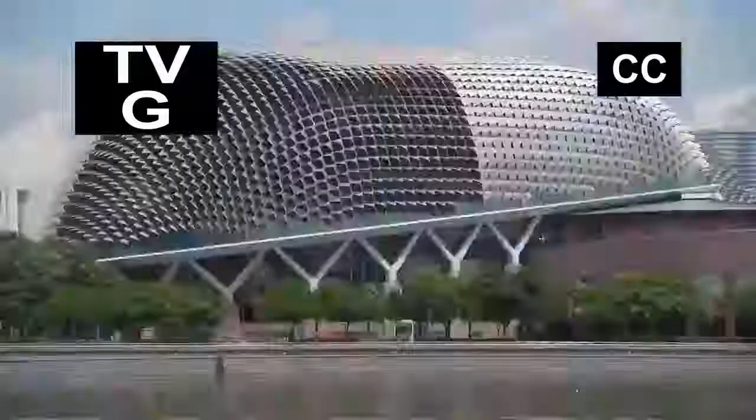My name is Danny Forster, and this is Build It Bigger. I'm an architect, and I've spent years traveling the globe investigating incredible feats of architecture. And right now, I'm going to take you behind the scenes of one of the largest construction projects in all of Asia. Singapore is reinventing itself. This small island nation is attempting to finish one of the most audacious buildings on the planet.

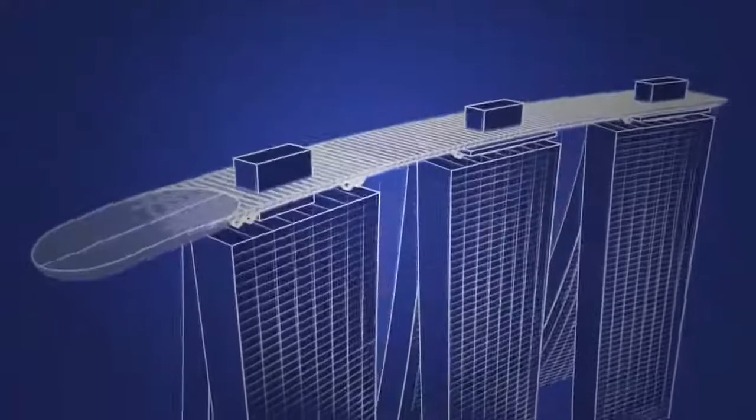It's the country's first casino, 3 skyscrapers, covering 9 million square feet, and topped off by an engineering masterpiece, the first ever Sky Park. Longer than 3 football fields, with gardens, swimming pools, and restaurants, all higher than the Seattle Space Needle. We're actually in the pool right now. We're in the pool. This is the view from the pool. Wow. It's pretty spectacular. That is amazing.

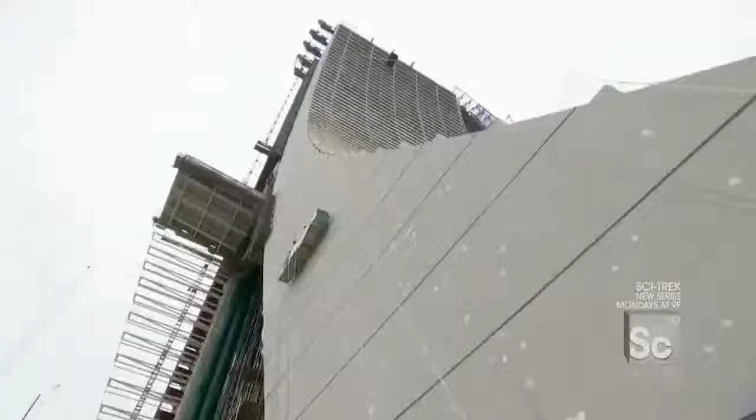To finish it, crews must perform some of the highest and heaviest lifts ever attempted. I mean, you're putting a piece of steelwork the size of an aircraft carrier on top of 3 towers. Tackle one of the largest paint jobs on the planet. You would never do this in America. And erect one of the longest cantilevers in the world. 200 feet out over nothing. Oh my God, that's enormous.

I'm in Singapore, a tiny island nation with less than 5 million residents. In fact, the entire country is smaller than all of New York City. Located at the southern tip of the Malay Peninsula in Southeast Asia, the main island of Singapore is both a city and a country, one of the most densely populated in the world.

Culturally speaking, it's a somewhat strict and buttoned-up environment. Chewing gum against the law. Insensitive behavior is punishable by fine. And if you're caught vandalizing a building, you quite literally get hit with a stick. But despite this conservative cultural backdrop, Singapore is attempting to reinvent its image by doing something totally surprising. They're going to open a massive casino.

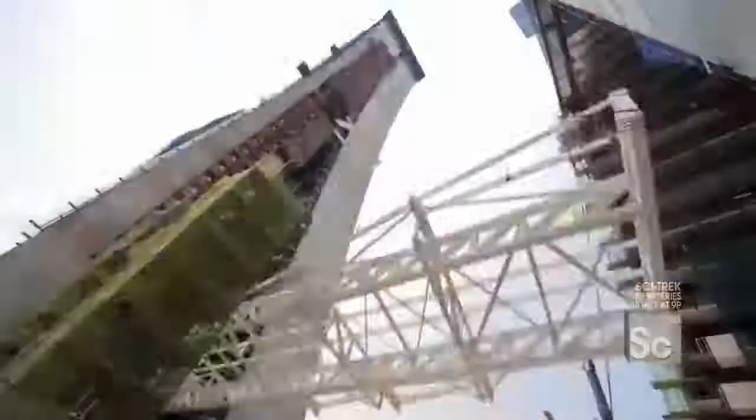With no natural resources of its own, Singapore is risking $5.5 billion in hopes of cashing in on the gambling boom exploding across Asia. It's a pretty significant gamble because for Singapore, we've never had gaming before at this scale. We've never had a resort at this scale. Yes. You're taking a kind of a major leap. Yes, it's certainly a transformational project for Singapore. Where you hope to actually not just double, but triple the tourism receipts. That's big.

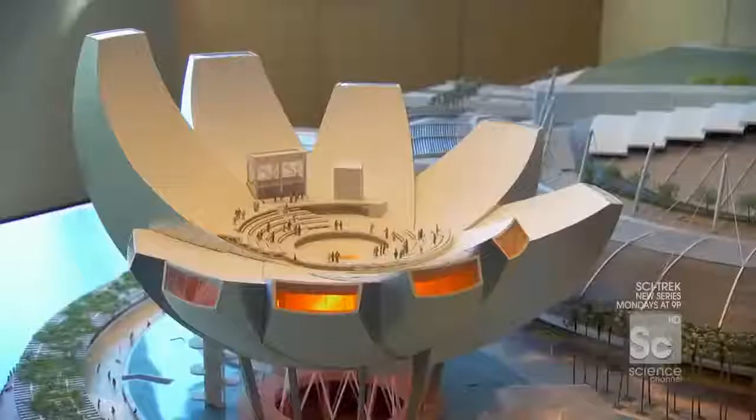The centerpiece of this giant transformation, the Marina Bay Sands. One of the biggest and most expensive casino complexes in the world. Unlike any hotel and casino ever built. Rather than just being kind of a traditional hotel and casino that we might find in Vegas, instead, we have a museum, you have theaters, you have retail, you have a casino, massive convention center, 3 incredible hotels, and all of that capped by the first ever Sky Park. That is absolutely right. The Sky Park on the very top will become the icon of Singapore, we think.

In a move that has never been done before, world-famous architect Moshe Safdie put a park across the top of 3 massive skyscrapers. An 1,100-foot-long urban oasis with tropical gardens and one of the longest swimming pools on Earth. All of it perched 55 stories above the ground.

So, Brendan, how do you describe a Sky Park to people? I mean, it's just a fantastic structure. I've never seen anything like it. There's 3 55-story towers, and you're putting a piece of steelwork the size of an aircraft carrier on top of it. So it's quite a feat. And there's a park up there. There is, well, there's more than that. There's observation decks and swimming pools and restaurants and all sorts of things. So it'll be a little city in itself.

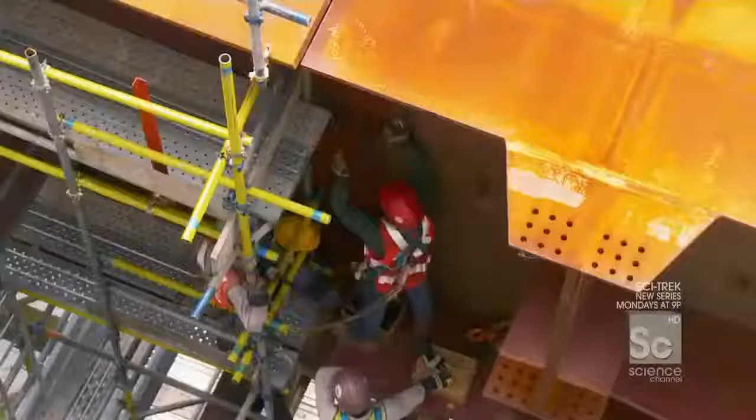The biggest challenge for builders, lifting 7,000 tons of steel, which is more than the main span of the Brooklyn Bridge, on top of 3 650-foot-tall buildings. To get it up there, the team divided the structure into 14 large but more manageable segments. 6 form the bridges connecting the towers, and the other 8 make up the observation deck, which sticks out 218 feet from the end.

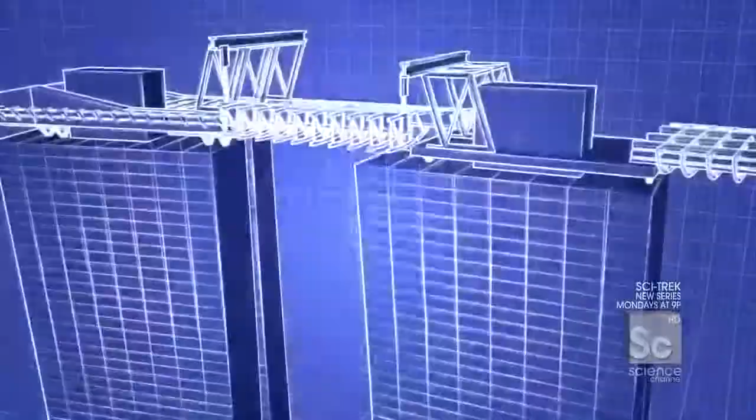And right now, crews are about to lift the second to last bridge segment, a massive 350-ton piece that will hang between towers 2 and 3. It's a little after 7 p.m., and on most job sites, it'd be quitting time, right? Folks would be going home. But here in Singapore, we're about to begin one of the most critical lifts in the entire project. That bridge segment right there, an over 350-ton chunk of steel, is about to get lifted up over 650 feet in the air.

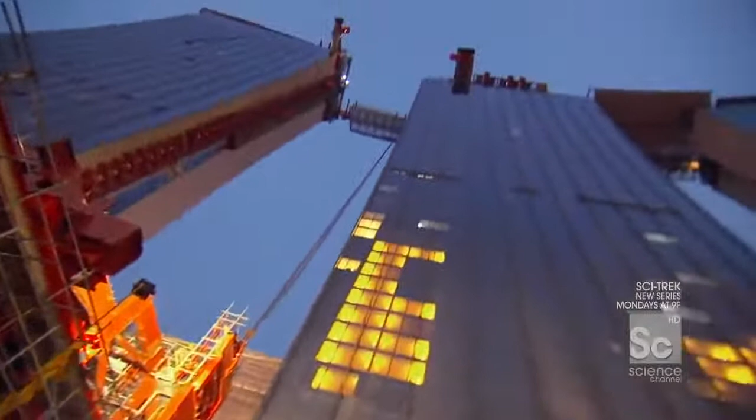I mean, you know, in principle, this sounds crazy, right? Yes. I mean, we're actually taking a bridge, lifting it up, and putting it on top of 2 skyscrapers. Yes. This has never been done. Never done. So you got to be a little bit nervous to get this thing up. Oh, definitely. Yeah. We have to get it right.

Lifting this piece will take some of the strongest hoisting cables ever designed. Going up? All right, Solomon, up here? Yep. They get attached to the very top of the segment, 5 stories up. All right. And now, at long last, I'm on the top of the whole bridge segment, and you really get a sense of its length, because look at that. It spans all the way out between 2 full towers over 150 feet long.

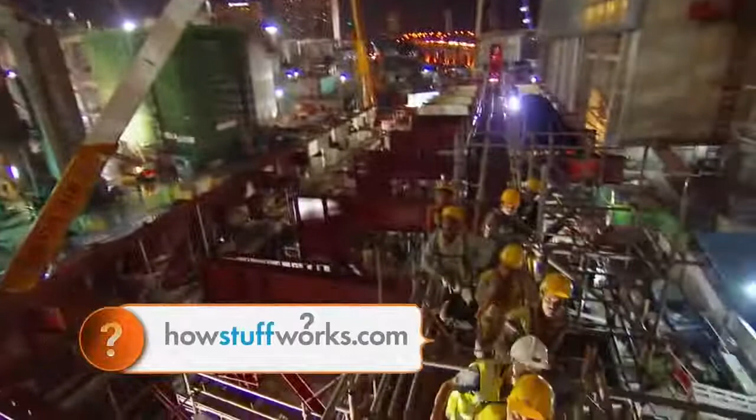And here, this is what it's all about. This is the shackle coming down over 600 feet up. And to really get that point, come here, check this out. Look at the amount of bound cables inside of this thing. Just the density. It's 2 of these shackles, one on this side, one on that side. We're gonna lift up over 350 tons of steel.

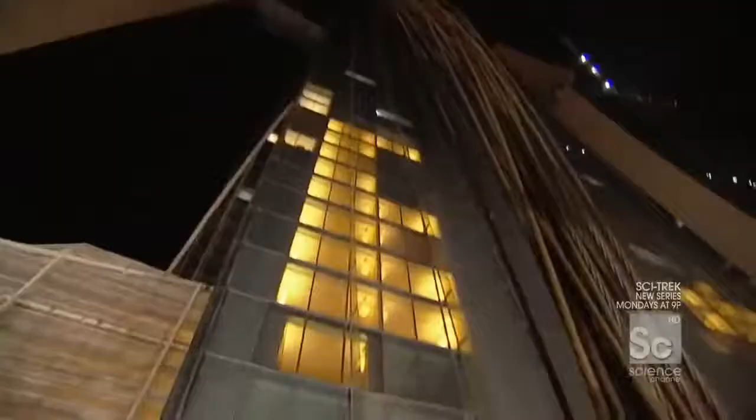All right, you call the man upstairs. An operator from the top of the sky park lowers the shackle down. There she comes, there it is, here it is. Okay, 960 mm. It has to line up within 1/10 of an inch for this 150-pound anchor pin to fit through. Oh no, I'm stuck. Push, fight, come on, shake it a little bit. Hammer! Give it to me, Poppy. Out here. You ready? Here I come.

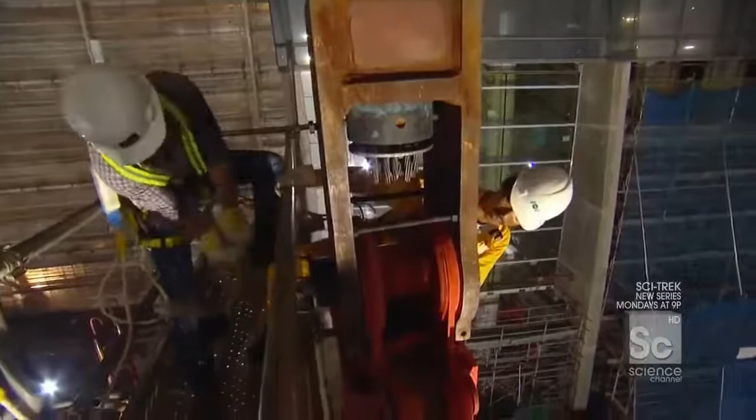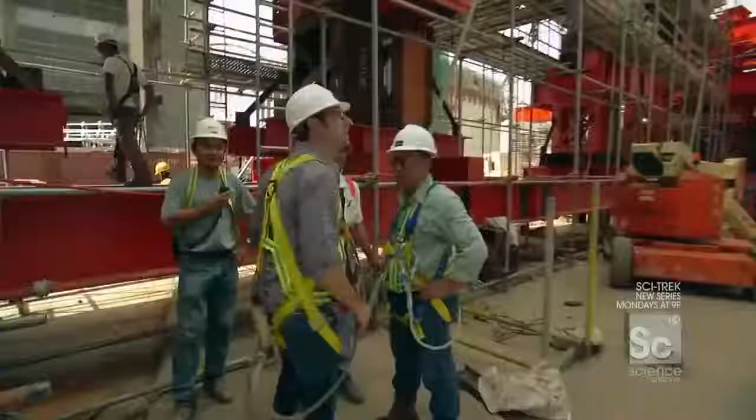Once the pins are pounded into place and the shackles are connected, there is one final step to make sure that the load is secure. Woo! Overnight, crews test the connections for 12 hours by hanging the segment just 4 inches above the support. If everything looks good, it is ready to go up. Okay, Solomon, she's floating. Yes. 4 inches off the ground. Ready for the lift? Yes.

How's the wind? If you can see it, it is swinging. And if it swings, it might hit the building. So when the lift begins, the concern is in a strong wind, like a pendulum, it could move and actually hit the building. Yes. It's that close to the building? It is very close to the building. Because of the curvature of the towers, this piece must pass within 10 feet of 2 glass skyscrapers on its way up. Any wind over 5 miles per hour is enough to call off the lift. So are we good? Are we ready? Yeah, good. So it's now okay to go.

Okay, I'm ready. Typically, crews would use tower cranes for heavy lifts, but this segment far exceeds their capacity. So instead, engineers are borrowing the technology from a different kind of construction: bridge building. Even the most powerful tower crane can lift about 20 tons. This thing weighs over 360, not an option. So they went with something called a strand jack. And to understand how it works, imagine 2 hands or clamps holding a rope. One hand locks the rope, the other brings the rope up, grabs the rope, goes back for more, brings up more rope, and so on and so forth.

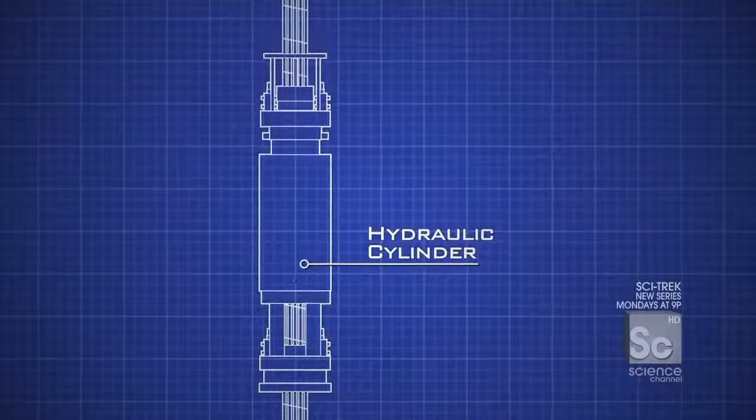Strand jacks work on simple hydraulics. A bundle of 22 half-inch diameter cables passes through 2 clamps. The top clamp grips the strands and moves up almost 2 feet. Then, the bottom clamp locks the cables in place while the top moves back down for the next pull-up. It takes 2 enormous strand jacks to lift this segment, one on each tower. Combined, they could lift the Statue of Liberty. It's the first time that this technology has been used to make lifts this heavy from the top of a skyscraper.

Tony? Danny. Welcome, Danny. Good to meet you. Good to meet you. Tony, where am I standing right now? Well, you're on the Sky Park. So this is kind of where the action is. This is where the pool is. Yep. Right where we are now is the second swimming pool. We're actually in the pool right now. We're in the pool. This is the view from the pool.

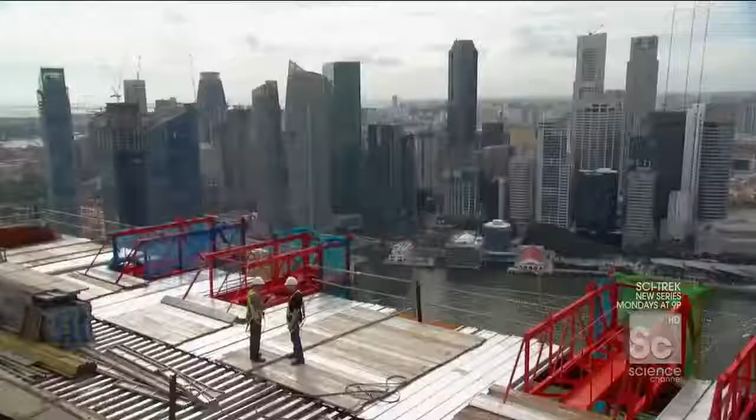Oh my God. People will be able to swim out to the edge of the pool. Yep. And literally, there'll be no edge, right? It'll be an infinity edge looking out over Singapore. Wow. It's pretty spectacular. That is amazing. And what's making all of this happen is this really just nasty-looking beam. That's right. So this enormous frame is supporting the strand jacking units. Now, can we actually head up top to the strand jack? Yeah, we can. Let's go this way.

The strand jack sits on a temporary support structure that extends 30 feet out from the side of the tower. So, Tony, where we're walking right now, we're actually leaving the skyscraper below us and now heading out. We've just walked off the edge of the building.

Okay, so I am now standing at the very top of the strand jack. And you know that because right here, this is it. This is the top of the cables. And what we're about to do, every 30 strokes, they stop everything, clamp the lift, and spray some lubricant inside to make sure everything moves real freely. Unfortunately, I'm getting tasked with that role right now, so what do you got, some WD-40 we're doing this with? Look at this guy. Why is this the most low-tech thing in the world?

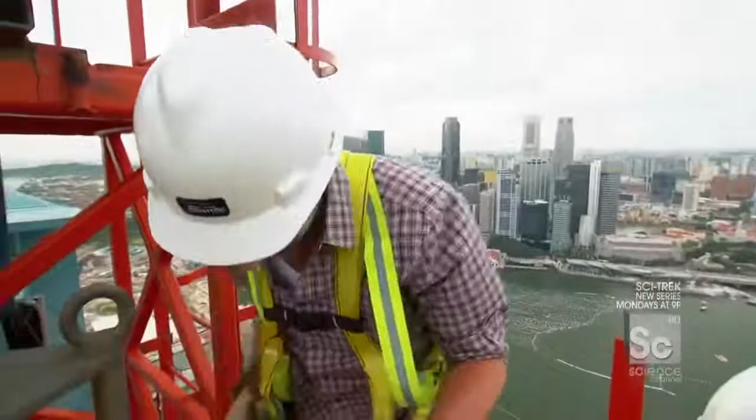Okay, so now what we've done is we've taken the collar off, we've lowered the jack down, now we've exposed the cables to give us good access for some good greasing. Okay, Romley, how do you grease it up? Spray and pull out. Put in, spray, pull out. Go in, spray, pull out.

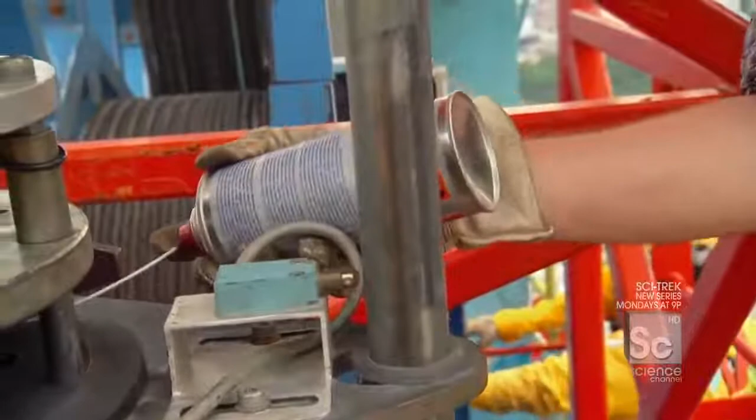You know, it's sort of humbling to have to climb up to this point, to have that behind you, to have to take a spray can like this, stick in, spray, pull out. Stick in, spray, pull out. Go in. These guys have to grease these cables once every hour for the entire night to get this segment up the final 500 feet to the very top of the sky park.

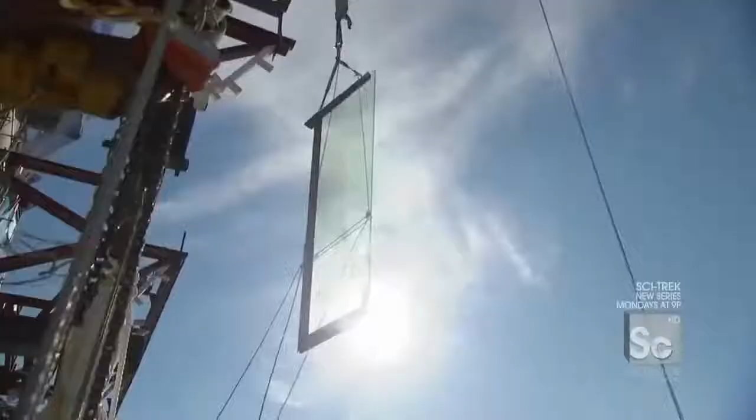Coming up, a one-of-a-kind solution to fight Singapore's intense sun puts up a fight of its own. Hang on. Whoa. I'm gonna pull you right outside of the basket.

Singapore is just 14 miles long. And with literally nowhere else to expand, this tiny island is increasing its footprint by actually filling in the sea, creating almost 1,000 acres of land on which to build an entirely new downtown. So tell me something. If I was standing here 5 years ago, what would I have seen there? Well, 5 years ago, you wouldn't see the floating gallery, you wouldn't see the wheel, you wouldn't see Marina Bay Sands, neither would you see the financial center. So this is a radically different skyline in just 5 years' time.

Yes. Singapore's evolution involved 30 years of land reclamation, followed by 5 years of construction, all culminating with the Marina Bay Sands. So 5 years ago, this would have been called the old downtown of Singapore. Yeah. And now with the Marina Bay Sands completed, this becomes the new downtown. Yes, absolutely.

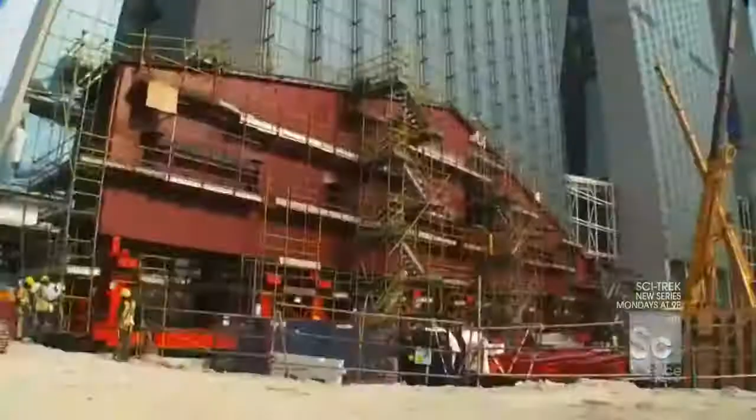The Marina Bay Sands' 3 hotel towers will offer guests phenomenal views of Singapore's new downtown. But they also had to be a stunning centerpiece for the city's redevelopment. So, to define their curved silhouette, the architect clad the tower facades with 1,900 glass fins, which also perform a key functional role for the building.

The western face of the towers gets the most intense afternoon sun, so when the light hits the fins, they actually deflect the sun's rays, casting a shadow that reduces the heat on the hotel rooms by 20%, while still enabling clear views of the bay. But this distinctive design feature is also one of the most difficult to install.

I think today is gonna be one of those days where I go and do something that I kind of think I shouldn't do, but in the name of really understanding how it is they build this building, we're gonna do it anyway. I'm gonna take you in a gondola up the side of a building, almost 600 feet, to install glass fins. And the guys who are going to help me do it are right here.

Terry? Hi, Danny. Good to see you. David, how are you? Danny, good. Not bad. What are we up to, fellas? We're actually going up to the top. Basically, we're going to install the last fins to Tower 1. And these fins are actually hanging perpendicular from the facade of the building. That's correct. Each fin is 10 feet tall and weighs 400 pounds.

They're hung in straight vertical lines, protruding up to 4 feet from the side of the tower. Because the facade actually curves outward 5 degrees at the top, there would not be enough clearance for the Sky Park lift to pass by. So 12 fins in the upper corners of each tower were left off until now.

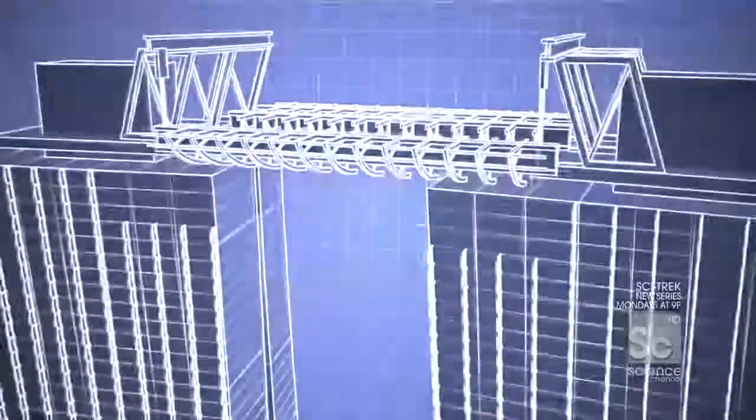So this is it. We are closing up the curtain wall of Tower 1. Yes. Big milestone. Big milestone. All right. Take me over to my maker. Let's do this. Okay. No problem. Lead the way.

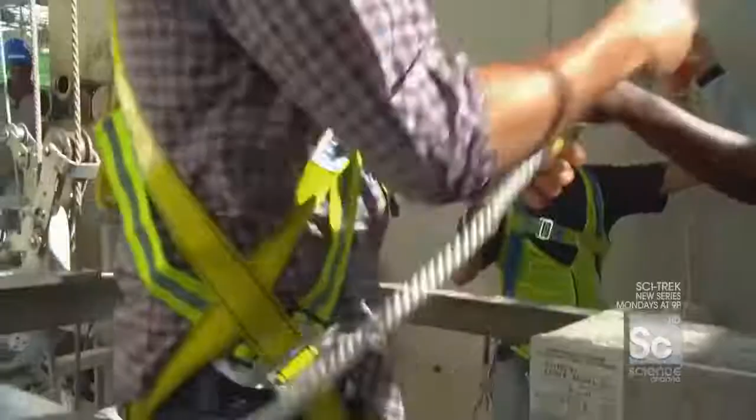Terry's crew installed the fins from a 6-foot-long gondola hanging off the side of the building. Okay. We doing? All right. You gotta be kidding me. It's basically the size of a bathtub, swinging from 2 sets of 650-foot-long cables tied to the tower. Show me the safety, please. It's so precarious that I'm going to be tied to a separate cable in case the main cable fails.

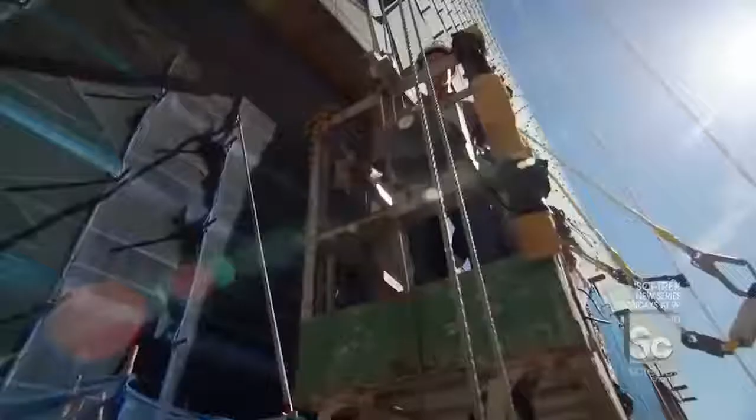Yeah, here we go. The gondola travels at just 0.2 miles per hour. Here I come. Moving along, just moving along. So it'll take me more than a half hour to reach the top. Oh my God. This gondola looks like it was built by the Unabomber. Sometimes I don't really feel like I give you exactly what's going on for me right now, so I want to give you just a little taste of what I'm seeing. There is a fantastic view of Singapore. There is Jay, my chatty friend. And there is not a good situation.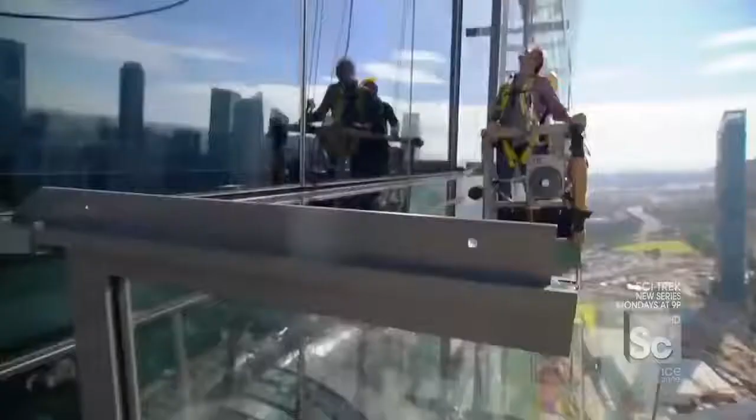There she is. Oh, the wind is really moving up here. That looks safe. Hey, fellas! How are you? Okay. Nice weather, huh? Okay, this is something you don't see every day. I'm outside a skyscraper, and right here, right now, I am touching the top of the building. We are on top of the skyscraper. All right, who's ready to install some fins?

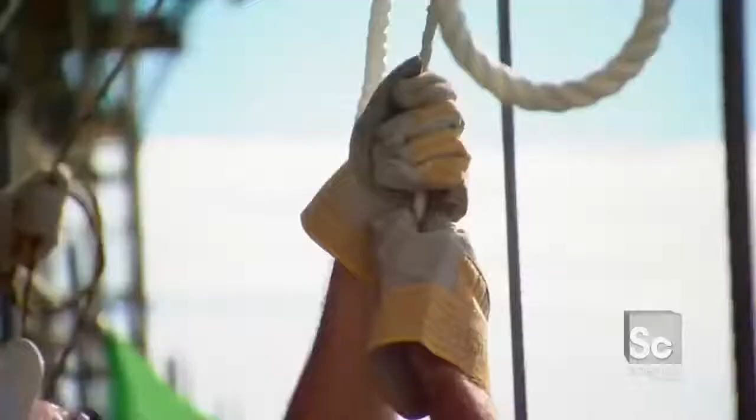Each fin is a custom-built pane of solid glass. I've got the line. Hang on. Look. On a calm day, they are extremely difficult to manage. The wind is blowing this thing out. Give me a hand. But on a day with even a light wind, the task is almost impossible. Hang on. You thought I was gonna pull you right outside of the basket. Hang on, give me some help. But I'm not kidding. Every time you get a little gust of wind, I can feel my feet getting cold a little bit. There she is, slowing down.

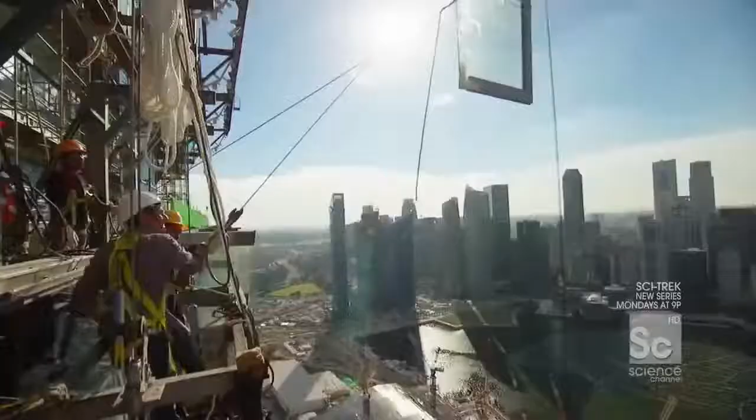It's basically like a big double laminated glass sail. And if the wind catches it, I mean, it moves. Okay, let it come down a little bit more. The fin can swing up to 20 feet while attached to the tower crane. Coming this way? Okay. Watch out. Someone help him. That's just too dangerous for the final installation. So the team has to transfer it to a more precise chain block mid-air. Whoa. Hold that side, please.

All right, so this is it. What we're doing right now is essentially taking the load from the crane and transferring it to that chain block. Are we in? Okay, I think we're set. This is another one of these moments in my life where I say to myself as an architect, did you really need the fins? Did you have to have fins? Building would have been fine, you know?

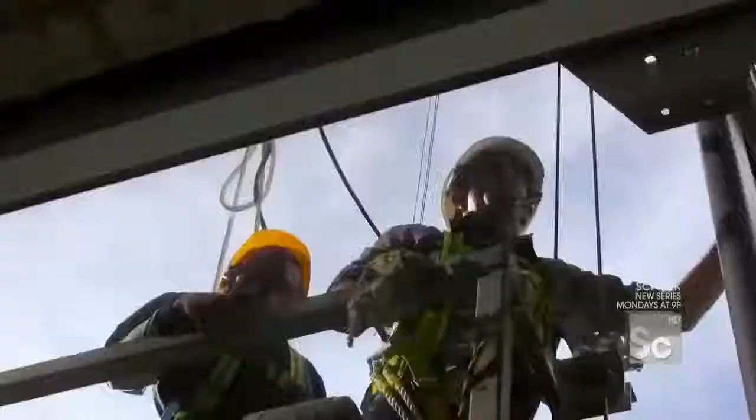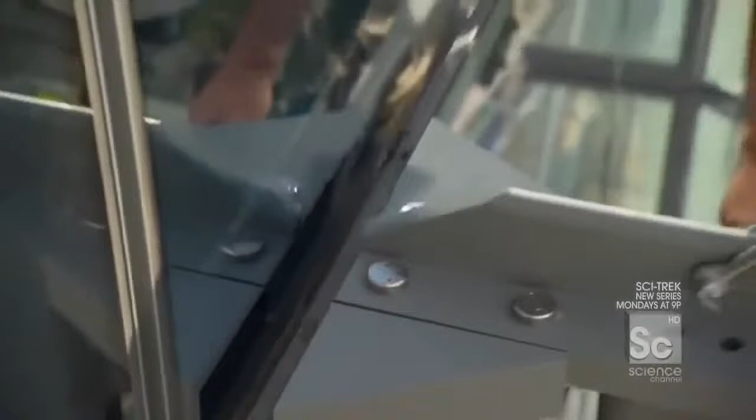Okay, gondola down. Yep. The fins are designed to clip into each other at the bottom. Need you now, Jay. But here, at the very top connection on the highest fin, it gets locked to the building with bolts. Oh boy, this is gonna be a nasty one. Okay, Jay. 4 bolts. Give me your thoughts. 1, 2, 3, 4, are we good? Okay. Come here, bring it in, I need some. Come on, give me it. There it is. Okay. That's right. Whew. 4 bolts, locked in, lined up.

We, Jay, are done. Can we go home? Home. Home, that much he understands. Let's get out of here.

Up next, building one of the longest and highest cantilevers in the world, jutting out more than 200 feet over nothing. Oh my God, that's enormous.

Singapore's new sky park is the first of its kind. A steel structure longer than an aircraft carrier, on top of 3 skyscrapers taller than the Seattle Space Needle. And on the northern end, the architect took this innovation one step further, creating the longest cantilevered observation deck in the world. It's the biggest and heaviest section of the sky park, and it hangs out 200 feet over thin air.

When it's done, the sky park is going to look to the eye like one 1,100-foot-long continuous element. But the reality is, it's actually made up of 2 very different structural conditions. Bridges on the one hand, and something called a cantilever on the other. Spanning between towers 1 and 2 and towers 2 and 3 are 2 bridges, basically acting like tabletops. The force goes from the bridge, transfers into the towers, and down something called shear walls into the foundation.

Now, the cantilever is a different story. A cantilever, by definition, is a load supported on only one side. So what you have here is a 218-foot-long span, almost like a diving board, perched out over nothing. Intuitively, that load wants to just twist off the building. So to keep it down, they've put not 1, but 2 700-ton backspans holding down the cantilever. The 2 backspans weigh as much as a fully loaded freight train.

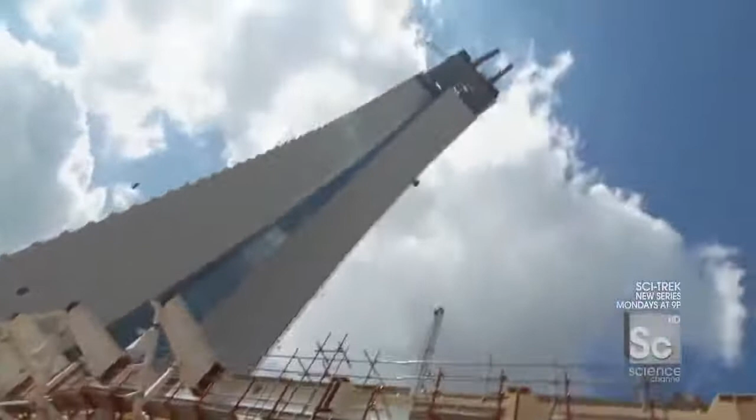But that weight is critical to balancing out the cantilever, which will jut out longer than a 747 from the end of Tower 3. There are 860 tons of structural steel that make up the 218-foot-long enormous cantilever. It is so big that they actually assemble the entire unit here on the ground before sending it all the way up there. The cantilever is just too big to be raised in one single lift.

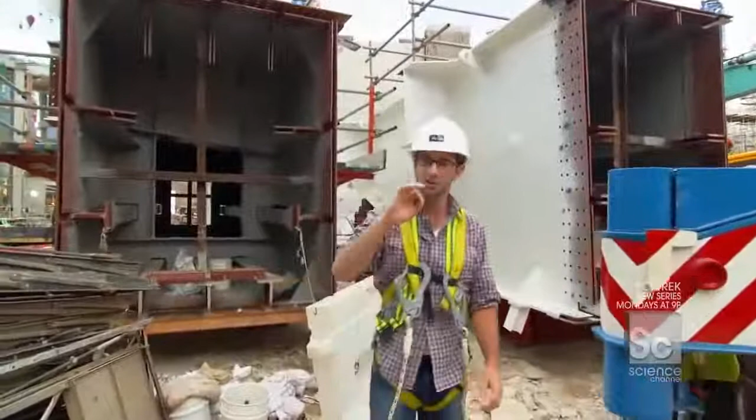Instead, it's divided into 6 segments. Once they're 650 feet in the air, crews will have just 1 shot to fit them together. So before the segments can be lifted, they're assembled on the ground to be sure that each connection will fit perfectly. So these pieces behind me represent the very final pieces of the cantilever to be assembled here on the ground. So once we get this and this bolted onto that massive cantilever, the lifts can begin.

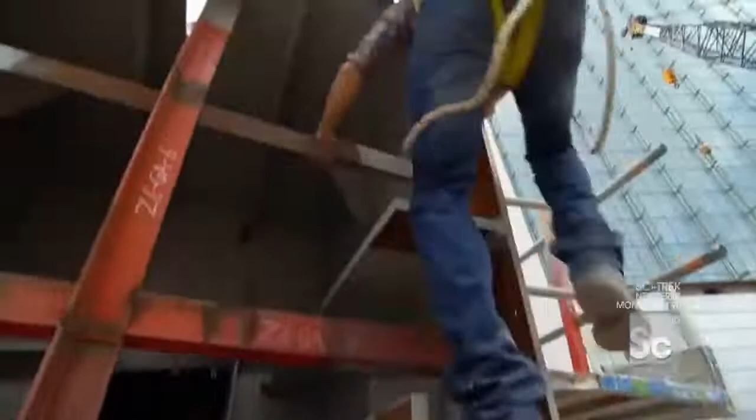So the crane's now setting the shackles up. We're going to go on top of the piece to connect it. The piece we're attaching today is 12 feet tall. Come on, jungle gym style, baby. And it weighs 30 tons, as much as 2 Mack trucks. A crane will lift it over to the rest of the cantilever using 4 extra-large shackles. So Viram's now tightening up this shackle. So shackle number 1, 2, 3, and 4 are all connected. The next step is to take the piece that I'm standing on, lift it up, and extend that cantilever another 50 feet.

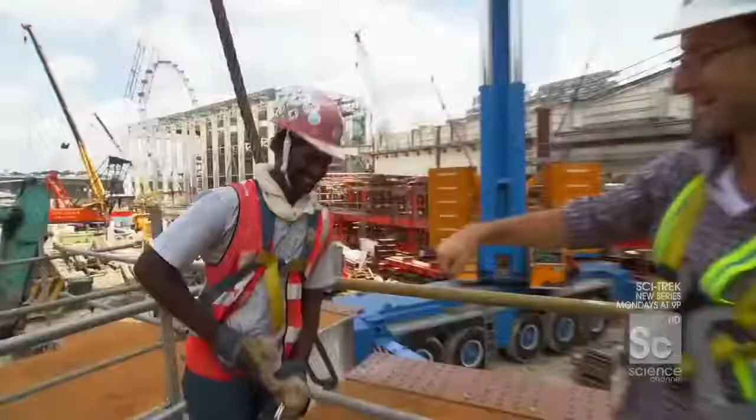You ready? Knuckles? Knuckles! All right. You ready, Knuckle Man? Knuckle Monster, you got it. Nux Magoo, come over here for that. Bang! We are ready to go.

So what they've done is they've just put a bit of tension in the line, lift the piece just off the ground to make sure the shackles look nice, and they know where the center of gravity is. So are we good? Are we ready? All right, let's go. She's off. Out of our hands. Now the crane's got her. He's gonna swing her all the way around this way. What's really worth noting is as you look at this thing, this massive floating piece of steel, it's but a small fraction of the entire cantilever that's going up there.

Even with 1.5 million pounds of steel, this cantilever will still be susceptible to the problem facing all structures: movement. All buildings, all bridges, even all cantilevers have a natural frequency, meaning they move ever so slightly. Now, if the movement of wind or even the movement of people starts to align with that building's movement, it can combine and literally shake a building. So when the engineers were designing the cantilever, they had to be concerned with not just how many people stood on the edge, but also how they were moving.

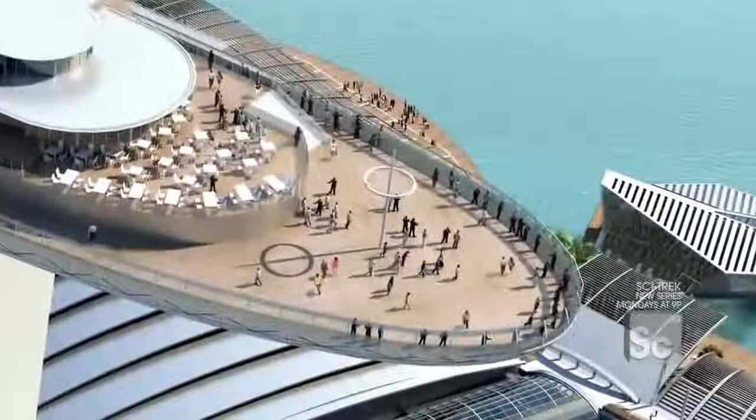This cantilever has been designed to withstand wind and earthquakes, but its most dangerous threat could come at the hands of a DJ. Yeah, it's thousands of tons of structure up there, so you and me jumping about, it's not going to do very much. But if you get 100, 200 people all jumping up and down at the same frequency, then it can actually excite the cantilever and you actually start to feel it. Right. It would take hundreds of people dancing to the exact same motion. Yes. Like the Macarena. Yes, that's right.

And believe it or not, our dynamics engineers have iPods with thousands of songs in them. No way. That actually have the frequencies of all of these songs. So, once we actually find out what the frequency is, in theory, you can say you can dance the Macarena, but you can't dance the bus stop or whatever else. That can't be true. Is that true? Yeah, that's right. So you're telling me that some engineer is doing intense load calculations and solving the fact that this thing can take the electric slide, but it cannot take the achy breaky heart. And they know that in advance, and it's been designed.

More or less, yeah. Imagine the party, like if the party's going great, a big wedding, and all of a sudden someone puts on the Macarena and is like, no!

Now that the piece has made its way over to the rest of the cantilever, the next major challenge is lining this giant segment up for attachment. So the piece is now literally sitting right on top of my head. And just imagine, on top of this incredible white long piece of steel will soon be a garden, a pool, and a dance party.

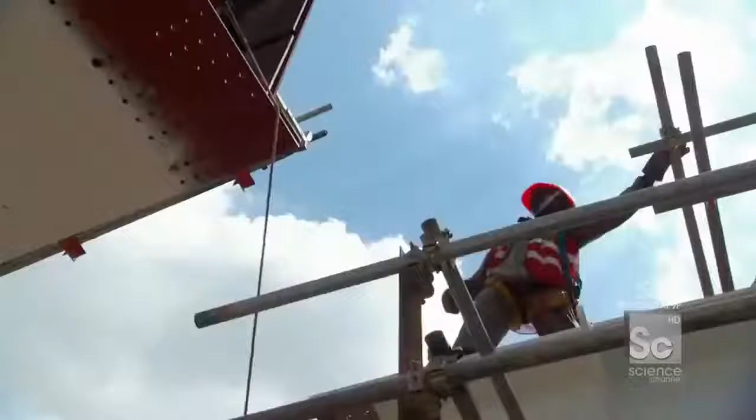Slowly got it down. Something incredible about lifts like these is that the first 99% happens almost instantly, and now it gets down to the details. Pushing it, pulling it a matter of inches, to get all of these holes lined up, to get the bolts in, and take the load off the crane.

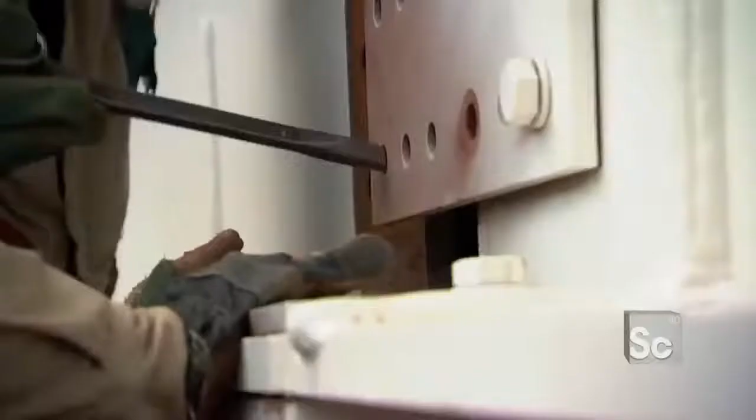Once the piece is in place, the crews have to line up all 1,500 bolt holes. There are so many bolt holes. They'll connect about a third of them here on the ground to make sure everything fits together before liftoff, because there are no second chances once this piece is airborne. So this is how one fits into the next piece right here. You have these two plates on top, and they're sliding over top of the previous cantilever piece.

Here it is, it's coming in, it's coming in. Once she's there, we'll put this pin in to lock the piece together so we can release the crane and move on. About 2 inches. Just about there, just about there. Okay? Yeah. Use the hammer. The pin secures this new piece to the rest of the cantilever so bolting can begin.

Man, I never do that. Usually I like break a finger and knock some steel off the thing and almost break the hammer most of the time. I knocked the crap out of that thing.

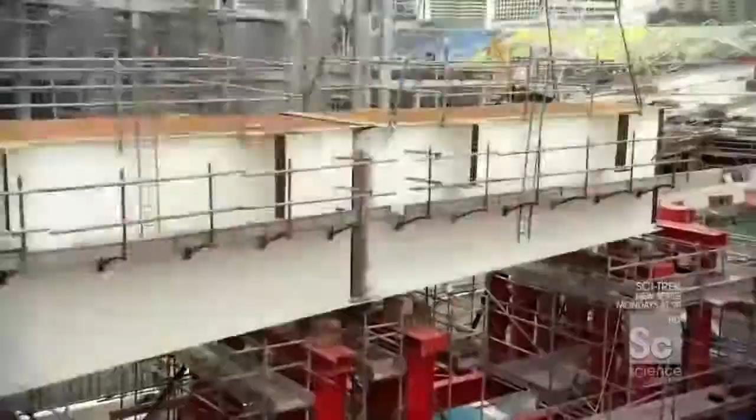Well, as you can see, the piece is in its final location. And now from where I'm standing, I think you can really get what this thing is. An 860-ton, 218-foot-long steel diving board that's going to be perched out over 600 feet in the air.

And coming up, a hotel like no other, with a lobby bigger than a cruise ship wrapped in glass. This is probably one of the most spectacular corridors I've ever seen. But first, what is the maximum number of people the Sky Park can safely hold at one time? The answer after the break. The answer to the trivia question: 3,900 people can safely be on top of the Sky Park, but only 900 of them can be on the cantilever.

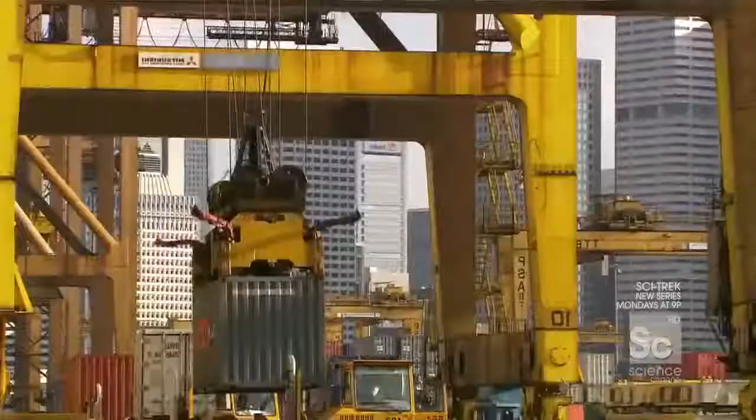Singapore is the gateway to Southeast Asia. And for the past century, its economy has depended on its location as one of the world's busiest shipping ports. But this city is in the midst of a makeover. When the Marina Bay Sands opens later this year, Singapore will instantly become one of the largest gaming markets in the world, putting it in the same league as Las Vegas, Atlantic City, and Macau.

When Macau opened their casinos, they looked to the past for inspiration. You have the Venetian in Las Vegas, you have the Venetian in Macau, a carbon copy, only bigger. But here in Singapore, a country so focused on image, they didn't want to mimic what came before them, but instead, they're trying to literally reinvent the idea of a hotel casino.

The difference comes down to design. The typical casino model involves a giant gaming floor with a flashy attraction out front and a hotel connected in the back. But with the Marina Bay Sands, the architect actually separated the hotel from the casino and relocated the attraction on top in the form of a sky park.

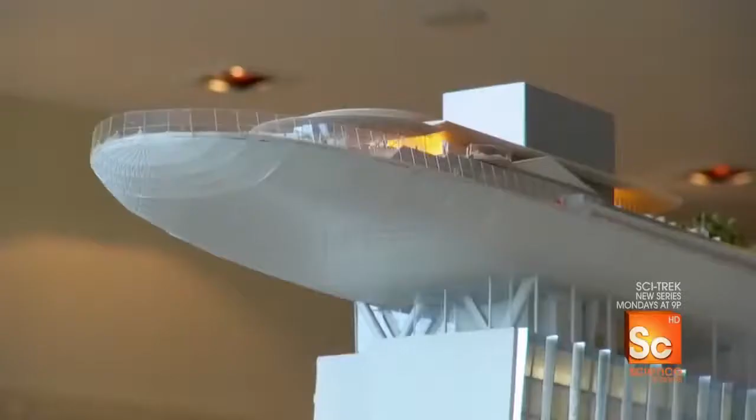From my perspective, when I think of a hotel and a casino, I think of a ginormous casino, a tall hotel in the back, and basically not being able to check in and go to my room without passing a blackjack table or a slot machine. This doesn't follow that model. It does not. Singapore has a very particular vision as to how they want the gaming component to work. What we built here was not something that was casino focused. It was all of this. So the casino is part of something far grander. And key to making that happen is not just building a set of normal, typical expected structures, but instead to do something like that. Correct.

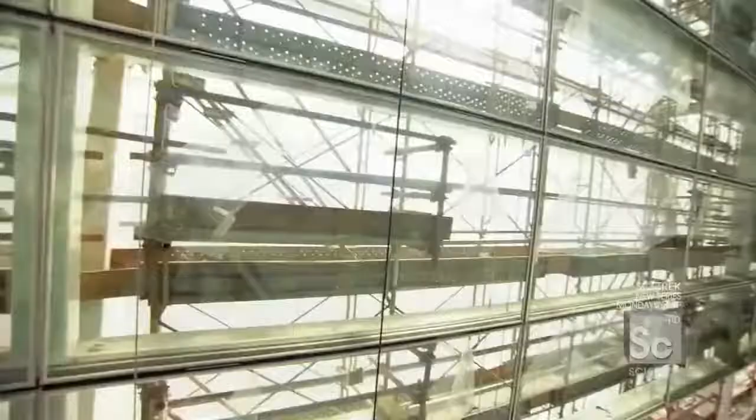This revolutionary design carries over to the hotel towers themselves. To create a hotel lobby like nothing before, the architect actually split each building apart for the bottom floors, creating one long tapered space linking the three separate towers together. The three hotel towers are all connected by one long continuous atrium. And that atrium is covered in glass. These massive 9-foot-long panels that we're about to take from down here and install right up there. 3,500 individual panels will hang throughout the atrium, transforming this space into one 850-foot-long tube of daylight.

So Terry, once the scaffolding comes down behind that glass, this whole chamber is going to be just awash in light. Yes, that's correct. And these spaces literally link all three hotel towers and let you look from one end of the building all the way down to the far end. That's correct. So this is more than just a kind of connective hallway from one hotel to the next. It's not just a corridor. This is not a corridor. No. And if it is, it's probably one of the most spectacular corridors I've ever seen. Correct. The atrium glass is a key part of the tower design, but it also plays an important functional role in sealing up the building.

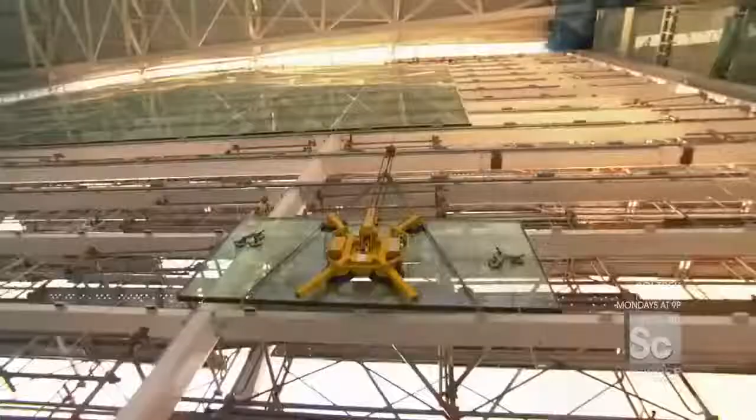With hotel guests arriving in just 6 months, the delicate job of hanging all that glass needs to happen quickly. Now, why is it so important to get the glass on the atrium and button up the facade? The vital bit is we actually have to make the building watertight as quickly as possible to enable all the final finishes to commence on the inside. So all the sheetrocking, carpeting, wallpaper, painting, that sort of stuff can't happen if moisture can still penetrate the building. That's correct, yes. So today we're going to be headed, where, up there? We're going up to the top and we'll be installing the top piece of the glass. So we have a big task ahead of us. To finish the atrium on schedule, Terry's team has to install 200 panels a day, about 5 every half hour. So here the guys are, they're just getting the glass ready.

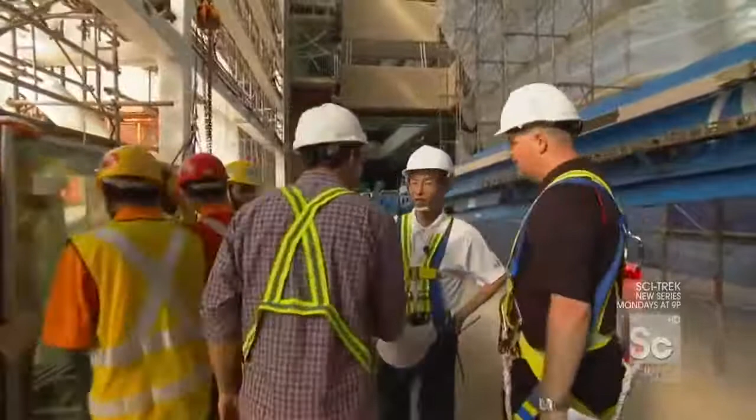A task requiring 8 international teams of glazing specialists. Hello, sir. I'm Y. Y? Nice to meet you. Nice to meet you. So Y, you're one of the installers? Yes. And you've been installing glass how long? Over 10 years. My experience is over 10 years. Your experience is over 10 years. My experience is almost 10 minutes. 10 minutes? So this is going to be a very good team. You and me together. Master and apprentice. Are you ready? I am ready. Let's get there. Let's do this. Let's hang some glass. Y and Danny? Why? Because they said so.

Let's do it, Y. We're installing the 3rd highest panel in this section of the atrium, more than 100 feet from the ground. Safety harness? I want you to be safe the whole time. In addition to Y and me, it'll take 10 other workers to install this 550-pound panel. The crew on the ground applies suction cups to the glass and then sends it up on an electric hoist to meet the crew in the air. Here it comes, check it out. And waiting for me, hello, my brothers! You guys ready to rock and roll with myself and Y? Ready? The big team. This is it. This is the Singapore Glass Stallions.

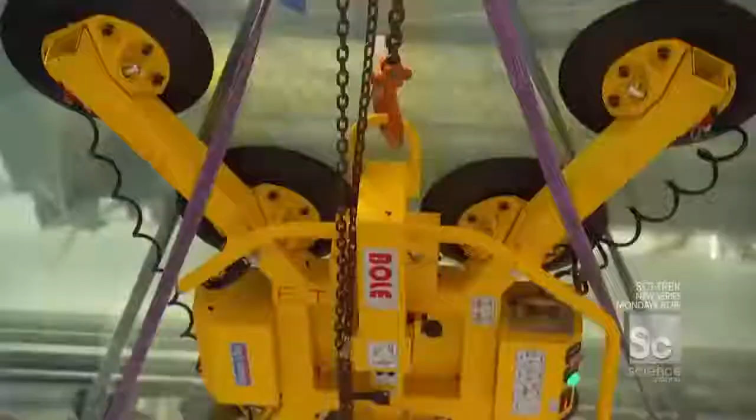All right, here it comes. It's a big piece of glass, huh? Y? Yes. What are we doing? What's the first step? The first step is we need to take off the handle. So I'll take off that side, you take off that side? Yeah, take off only the handle. Turn only. Yes. All right, I don't want to drop it, though. Don't want to drop it. Okay.

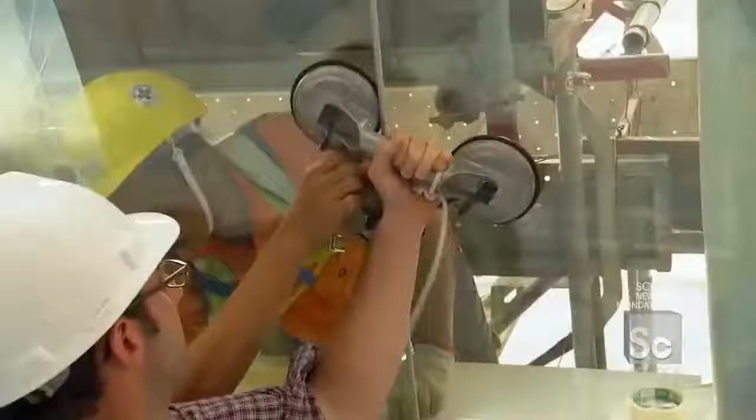The panel is supported by a backup system of smaller suction cups to help guide the piece on its way. Okay? Oh, okay. Yeah, okay, guys. It's okay. Let go? No, it's too scary. I'm not gonna do it.

Okay, I did it. 好，坐上去啊。 And just like the glass fins outside of the towers, we'll finish maneuvering this panel into place with the chain block. Yeah, okay, guys. Okay, so the chain block has lifted the glass panel to just about the height, as you can see, of the previous panel. So the next step is to push it in and get it locked into place on the brackets.

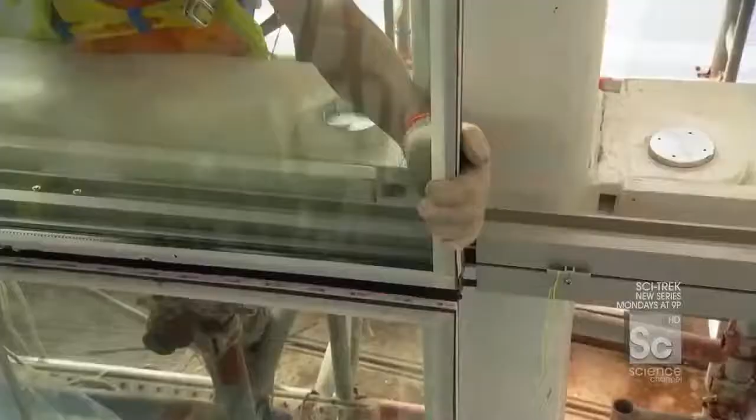Okay, why? Should we bring her in? Yeah, the last one. The interior work for the hotel cannot get started until all the atrium glass is hung and the lobby is watertight. I'm pushing, why? So to speed up that process, 20 attachment brackets come pre-installed on the atrium wall frame. They sit horizontally so the glass can slide into place. There we go. And then we'll turn them vertically to lock the panel to the building.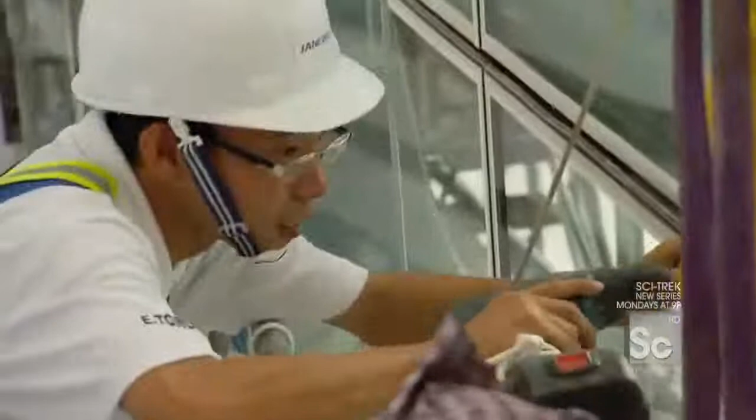Do I need the screwdriver? No, you use the power tools. I'm old school, why? Power tools. You make sure all the pressure bars must be tight because the hand power is not standard. You haven't seen my hand power, why? Yeah, hand power. Tight, yo. Check it, why? You don't trust me, check it. You have a look. That's just good stuff.

Yeah, good. Very good. All right, so all 4 sides are locked into place, and this glass panel is now fully supported by the building. So therefore, why, I'm pulling the plug. Suction is coming off. 3, 2, 1. Okay. All right. Very nice. Yeah. Look at that. Nice, huh?

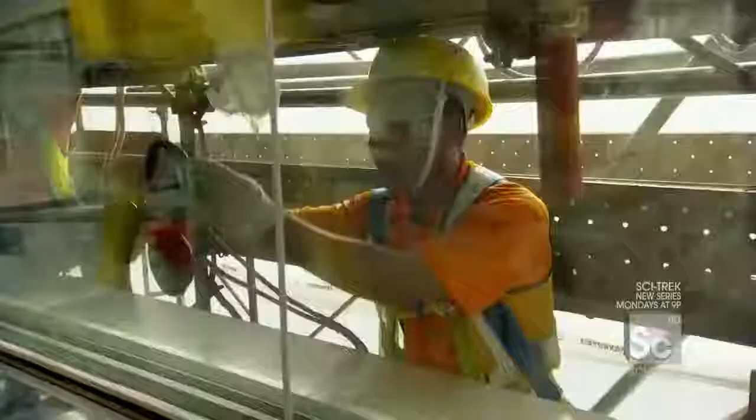Very nice. Why from Malaysia? Yeah. And his team do this 25 times a day. Best partner. And in just 6 months' time, this entire atrium will be covered in glass and shimmering with natural daylight.

Okay? It's you and me. Go home. Now, go home. And by go home, I mean hang glass the rest of the day.

Up next, racing to finish one of the largest paint jobs in the world. We're gonna use a brush. Yeah, brush. This brush. Yeah, this brush.

After 30 years, Singapore's ambitious downtown redevelopment is nearly complete. Its crown jewel, the $5.5 billion Marina Bay Sands, is due to open in just 6 months. And crews are racing to complete the hotel's complex facade. The glass on the face of the towers is complete, but on the side walls, the concrete remains exposed. So to finish those walls on time, there's another massive job ahead.

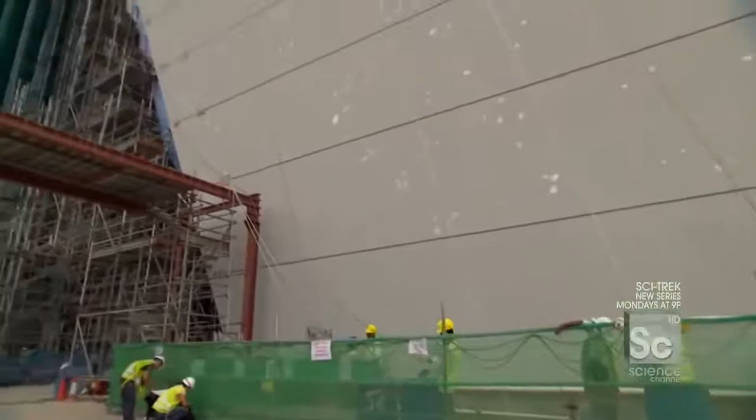When you clad the outside of a skyscraper, typically you cover it in maybe some stone veneer, maybe some glass, or maybe some metal paneling. What you don't do is paint it, right? Because if you've ever painted a fence, every couple of years you have to repaint that fence. But here in Singapore, they're so focused on things being clean, so focused on immaculate maintenance, they're willing to actually paint their buildings. So today, I'm going to do something that you would never see on an American construction site. I'm going to paint a skyscraper.

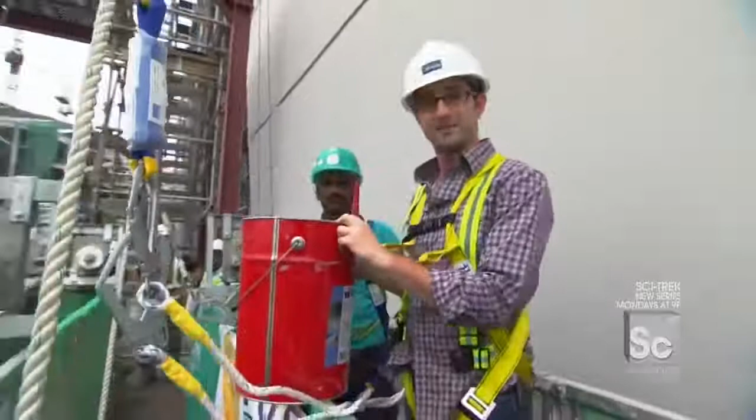Crews will have to paint an area about the size of Mount Rushmore. Muti, I'm Danny. This is going to be one of the single largest paint jobs ever attempted. So I got a bucket of paint, and in order to apply the sophisticated skim coat, the technology we're going to use is a paintbrush. Really, Muti? Yeah, this brush. It's a small brush, yeah? Yeah, small brush. One small brush.

Right, and obviously you couldn't do a skyscraper with that little brush. That'd be crazy. So instead, I have a roller, which ought to really expedite the process. Painting fast. All right, well, what more do you need? Muti, away we go. Okay. This wall faces the country's main highway, connecting the airport to downtown. So Muti, you're okay? Heights, no problem? No problem. And on opening day, with all eyes on Singapore, it's gotta look good.

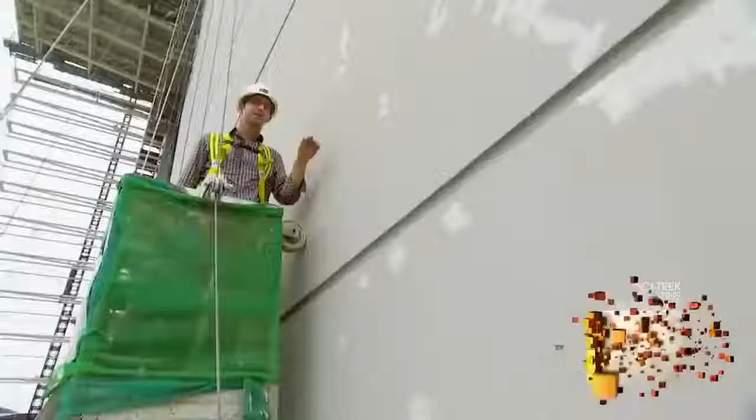Okay, so welcome to House Painting 101, Skyscraper Edition. So we're about 200 or so feet in the air. We've reached our cruising altitude in a super, super robust and technologically sophisticated gondola system. And what we have to do is fix this. This wall is a mess, right? Little holes that they've patched and filled. We have to have one smooth surface ready to be seen by all of Singapore. Muti, start with the dark gray first, huh? Okay, first. I'm gonna paint within the lines here.

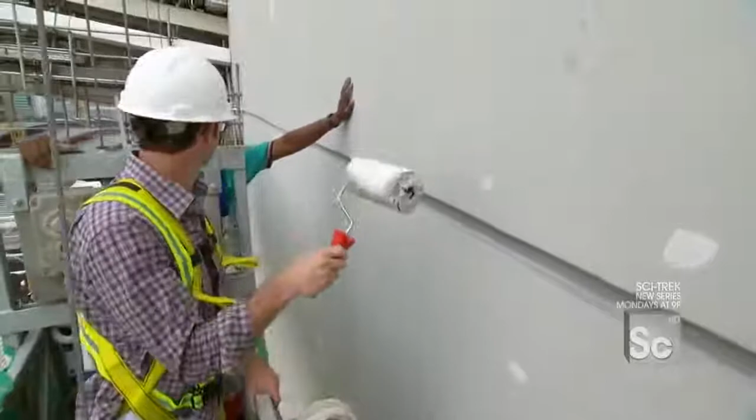The dark gray lines mark each floor of the tower, so you can still see the floor-to-floor separation from afar, giving a sense of scale to this massive surface. Okay, so now that the gray line has been deepened and darkened, we're gonna start painting the building. So Moody, just go to it, huh? All right. Nice and gray. I like that Moody's looking over like I'm touching at the top of the Sistine Chapel or something. In total, Moody and the rest of the crew will use more than 2,200 gallons of paint.

Moody, how's it look? Does it look good? Yeah, very nice, very nice. Good. Moody's loving it. To cover all the tower shear walls in time for opening day. And this project cannot afford delays, because every month the casino is not open, developers give up $100 million in lost revenue. So these crews have been running at top speed since day one.

So, John, just to put this in perspective for someone who's not used to seeing a project this size, it would take perhaps another country, a project this big, this expensive, this complex, as much as 6+ years to build. Yep. And you guys are on target to complete this in 3 years, half the time. Yep. And one of the critical aspects of this project at the moment is getting that Sky Park structure up. So getting the superstructure of that Sky Park done is key to kind of closing up this project and finishing this race.

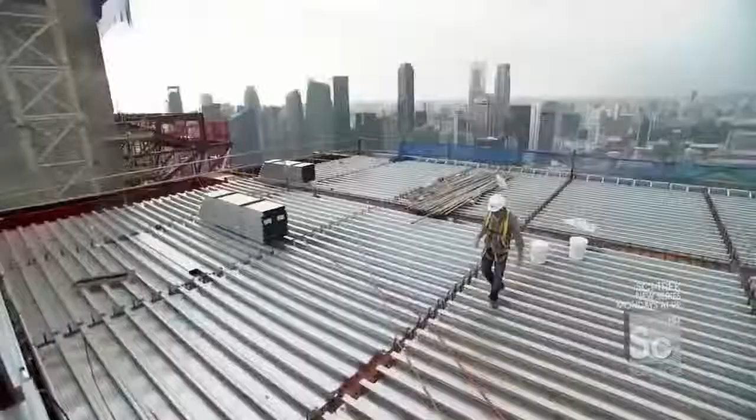Yep. But this is going to be a sprint to the finish, because crews up at the top of the Sky Park have only 6 months left to turn this mess of steel into the world's longest elevated pool deck. This is it. This will be the pool deck, and that will be the pool. But there's a problem, a pretty big problem. You go on vacation, you come to the Sky Park, you see this amazing view of Singapore, and then you fall through a hole to your death. Not good fun on the vacation. So Wilson and I are going to cover it with this aluminum decking. Let's cover the holes, my friend.

We're filling in the bridge segments between towers 1 and 2, more than 650 feet up. And there is literally nothing below us but the decking we're about to lay. Oh, I just got that thing. I just looked down and I saw a car, and it was so little, and my body was like, wait a minute, what are you doing up there?

All right, Wilson, how do we begin? Step 1? Yeah, step 1. Okay, you ready? 1, 2, 3. Okay. And slot in. Pull back. Pull back. Okay. Good. Put the clip on. Nice. Wilson, next piece. Plugging up the hole. Dear God. Okay, letting go. Woo! With these 10 panels in place, another 125 square foot section of this Sky Park deck is complete.

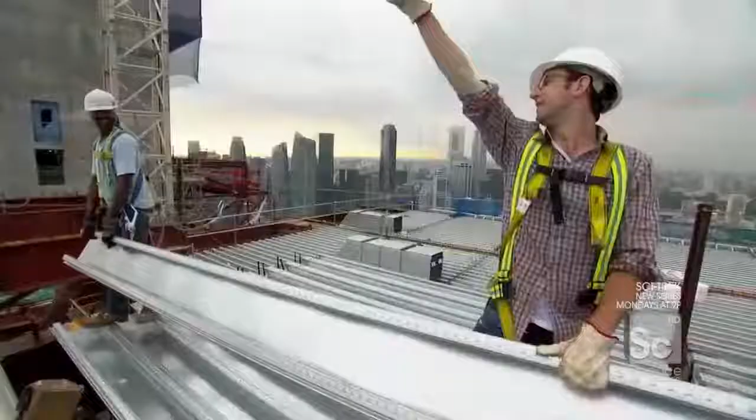Last piece, huh? Wilson and the rest of the crew will have to lay down 300 panels a day in order to have the entire Sky Park ready for opening day. Wilson, victory! Wilson, when the Sky Park is done, people will be swimming right there, dancing on that cantilever, having dinner in that restaurant. Yes. But we're not done yet, are we? Come back in 6 months, check out this Sky Park.

Me and Wilson will be having a cocktail and enjoying this ridiculous, incredible view. You're buying though, right? Yeah, correct. All right, cool. Wilson's buying, so it's all good.

When the Sky Park is complete and the Marina Bay Sands opens, Singapore will join the ranks of the world's top gaming destinations and fulfill a 3-decade-long quest to reinvent a nation. You know, for me, the moment when a building actually becomes a piece of architecture is when it transcends its function. So what I mean is, think of the Empire State Building. It's not just about the people who work inside of it, but it's really about the spirit of New York City.

The Marina Bay Sands is a project with a hotel and a convention center and a casino. But in reality, the sum is greater than the individual parts. This is a project where an architect, an engineer, an owner, and a government have all come together to literally try and reinvent the face of a nation. And I think if you come back here in about a year's time, that postcard picture you take of Singapore is going to look a lot like that.